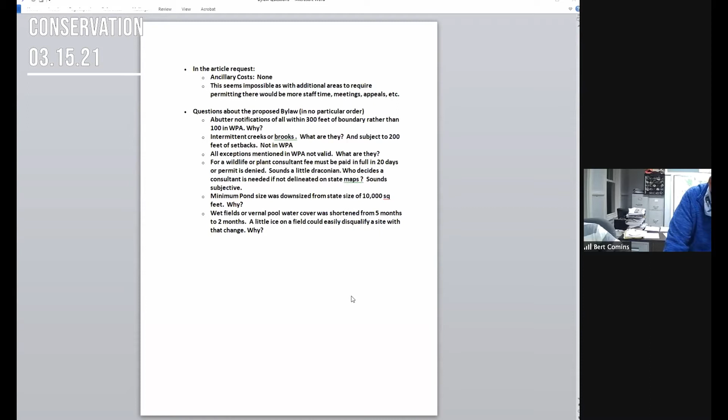Then questions in no particular order were: why is abutter notification of all within 300 feet of the boundary rather than 100 feet as in the Wetlands Protection Act? What are intermittent creeks or brooks? And the Wetlands Protection Act doesn't require 200 feet setbacks. Judy, should we address each of these? Well, I think the intent is to answer them, right? Yes, I agree. All right. Most of these regulations, weren't they taken from surrounding towns or towns that are similar to us? Yes, and they were also taken from the MACC, Massachusetts Association of Conservation Commissions' model bylaw.

Okay. Abutter notification is increased. It gives more people notice and the ability to participate. Intermittent creeks or brooks are streams as defined in the Wetlands Protection Act. And the bylaw increases the setback to 200 feet, classifying them in the same manner as rivers are classified in the Wetlands Protection Act. The bylaw is not limited to the limitations of the Wetlands Protection Act. In fact, the purpose of having a bylaw is to allow more flexibility and increase protections.

I don't have a list of exceptions in the Wetlands Protection Act. I'm not sure what that question means, Judy. Do you know? All exceptions are not valid. There is a part of the bylaw that mentions exceptions. Section 3 of the bylaw says that other than stated in this bylaw, the exceptions provided in the Wetlands Protection Act and regulations shall not apply under this bylaw. We could put together a list and post it on the website.

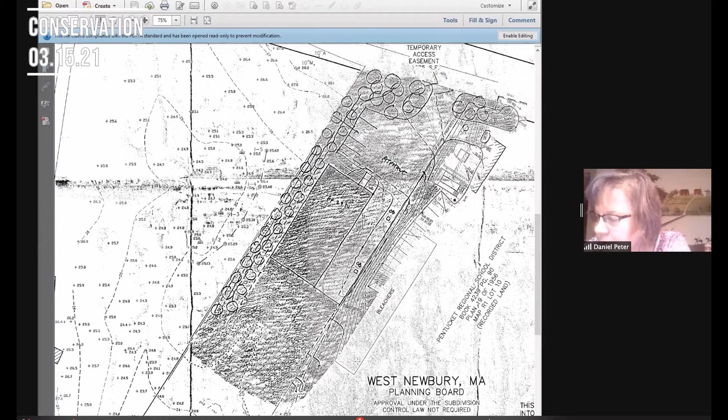So I'm here for a continued public hearing. I was asked if we would please do the calculation for isolated land subject to flooding for the area just to the west, as you're looking at the map, that puddle area, the depression area located off the property site. One thing that I wanted to make sure people understood is that there is no bordering land subject to flooding on the property or even the adjacent property, which we were analyzing in this case.

There's an Exhibit A, which shows spot grades on the plan that was originally provided, but I found a plan that had the spot grades in detail. From there, I blew them up and created Exhibits A and B, showing you these spot grade elevations, which I ended up using in the calculation for the isolated land subject to flooding. I've also referenced the Wetlands Protection Act regulations for isolated land subject to flooding and the Division of Wetlands and Waterways policy, which was revised in 1995. Exhibit C is the actual calculation used for determining isolated land subject to flooding.

I want to bring up the fact that on page 2, there were a couple of typos. The first one is down where you see 2,260 cubic feet over the acre feet. It should be square feet, not cubic feet. Underneath that long equation that starts with a V, it should be square feet for the acre. Bert, can you show what she's speaking of so we can see? And so that should be square feet in the next line too.

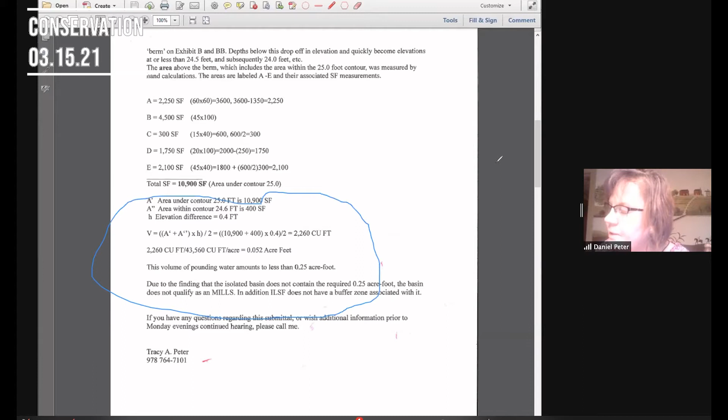And then the second one after that, I don't know if my computer auto corrected, but "mills" is isolated land subject to flooding. Yep. So what I did is I had to determine where the berm was. Let me just look. Is that an existing berm? That's where the water accumulates behind. It's not a berm. It was the area where the elevations change and drop off. Right. It's pretty much contained above the berm, and then it drops off to 24.8 from 25 feet, and then it jumps down to 24.5, and after that there's the contour for 24.

So I was trying to be conservative, and I calculated the volume of water contained behind that line that I labeled berm. From there, I took the calculations measuring the lowest elevation inside Exhibit B, which would be 24.6. That would be one elevation, and the upper elevation would be 25 feet. I calculated the total square foot area from the berm north, and it came out to be 10,900 square feet, area under contour 25. The area within contour 24.6 is 400 square feet. And the difference of elevation between the two is 0.4 feet.

And then we plug it into that equation: A plus A times 0.4 over 2 equals 2,260 cubic feet. Then divide that by the square foot acreage, and you get the acre feet: 0.052 acre feet, which is way less than the 0.25 acre feet, less than a quarter acre foot. And the area south of the berm is not a contained basin? No, that's where it would flow out.

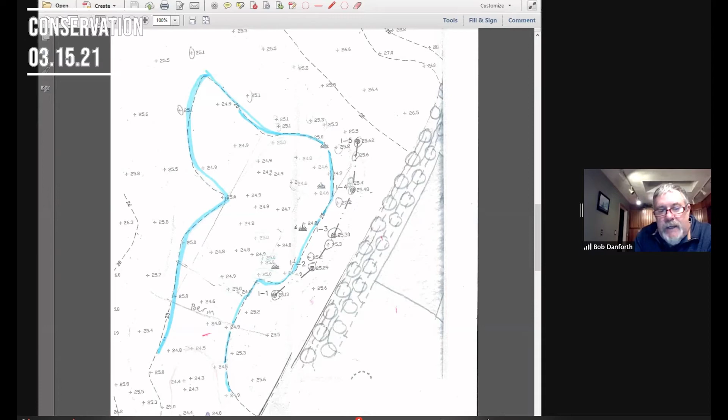I'm looking at a plan that is dated March 12th, 2020, which locates the building. Oh, that's the new one. So we moved the building almost 40 feet away. We moved it way away from there. I can give you some calculations right now. I think it was in the original filing, actually. I have it attached. But we're 50 feet off the property line with the building.

Okay, I'm just thinking, the earlier plan showed the building further away from the wet area. And now with this plan, you've moved it closer to the wet area, is that it? No, that's an old plan. Yes, that's not what was submitted. She's just showing the topos on that, that's all.

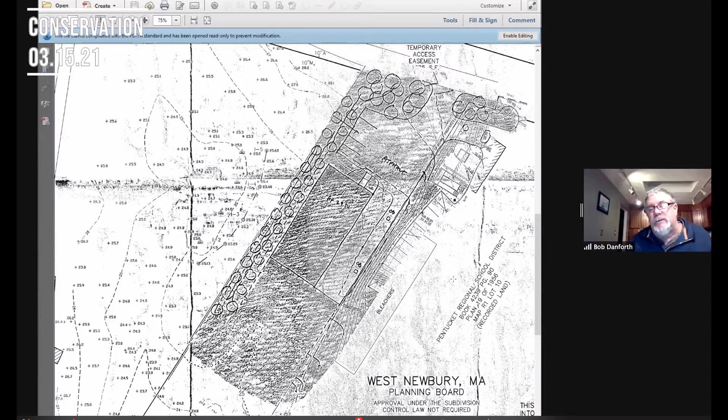Oh, I see, you're looking at the large plan. So Tracy, this was the full-size plan that you submitted. You're looking at Plan A. It's been changed since then. Right, exactly, this Plan A. I submitted that to the commission, but the actual building itself is in the original RDA. There are copies of it. They moved it almost to the property edge, the other side, near where the bleachers are, with a driveway coming in along the side of the building.

So the building would be 50 feet from the property line. And there would be a 20-foot wide driveway coming in along the side of the building, going out to the back of the building. And the driveway is what type of material? We're proposing gravel right now. We've got a limited budget. We'd like to pave it eventually, but we're trying to do it without raising taxpayers' money. So we've got it proposed as gravel for now, and then eventually paving.

If you wanted to, in front of the building, coming in off the driveway, there will be a garage door and a walk-in door where the cars park. If you want that paved, we have enough money to pave that. Well, which plan, Judy? It seems like there's more than one plan here. I want to make sure we have one final plan.

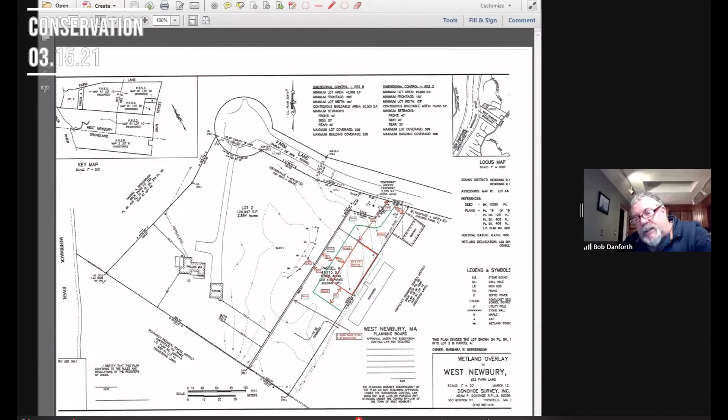Okay, and this plan we're looking at is dated March 12th, is that right? Yes. There is one other plan. I'm not sure, I don't have the date on it. There's another one, Bert? Yeah, so there were 3 total. There was one that did not show the green driveway area, the one that was actually submitted with the RDA. What is the date on this one? It's also March 12th, 2020. Okay, I think we need one plan so there's no confusion later on. Oh, absolutely.

And I would also like to see the calculations that Tracy was discussing on the plan instead of in a separate letter attachment. I feel like that's something an engineer typically would do. Sorry, I didn't understand what you said. Typically those kinds of calculations, I think, would be on the plan that's submitted. There'd be like a box or something that would explain the calculations. Well, the calculation is to determine whether it meets isolated land subject to flooding, but it does not. Right, but I would like to see that on the plan and have it stamped.

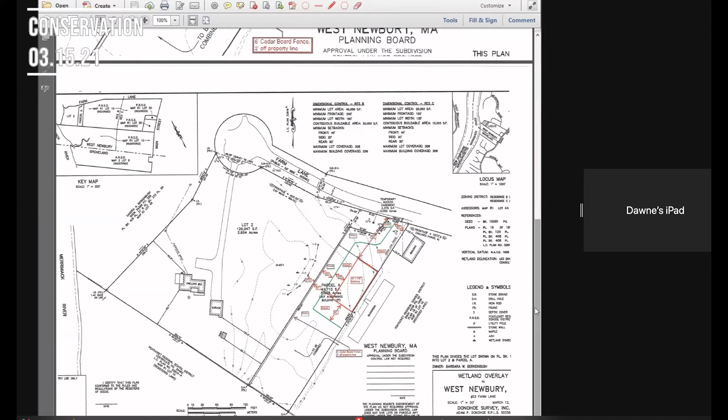All right, Bert, I think we're using the contours to define the wetland in the calculation? No, it's for the flooding. Yes. Okay, so Bert, you're gonna go take a look at this and then we'll revisit it in 2 weeks. Thank you. And Bert, are the submittals in the Google Drive folder for this? Yes, they are. The ones that Tracy was discussing? Yep. Okay.

Bert, when you walk, can you give me a call? Just call the facilities. I'd like to walk it with you. Yeah, I'll give you a call. All right, will do. Thank you, Bob. I just had one other question before you go.

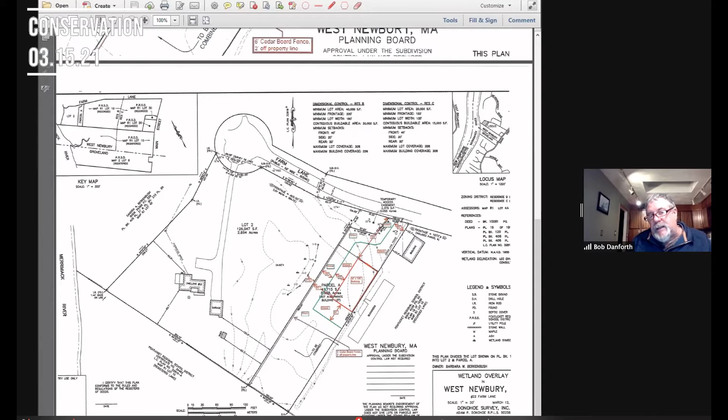Your preference is to pave it, but you're gonna use gravel to begin with. Is that correct? Well, yes, if you want the driveway paved from the road in and the parking for probably 3 to 4 cars, I'll pave that in front of the building. But around the building and behind the building was gravel. Okay, great, thank you. Yep.

What's on the agenda next? Middle Street. The applicant had requested a continuance for both those notices of intent, so for Middle Street Lot A and Lot B, they've requested a continuance. Next on the agenda is the continued public hearing for 519 Main Street.

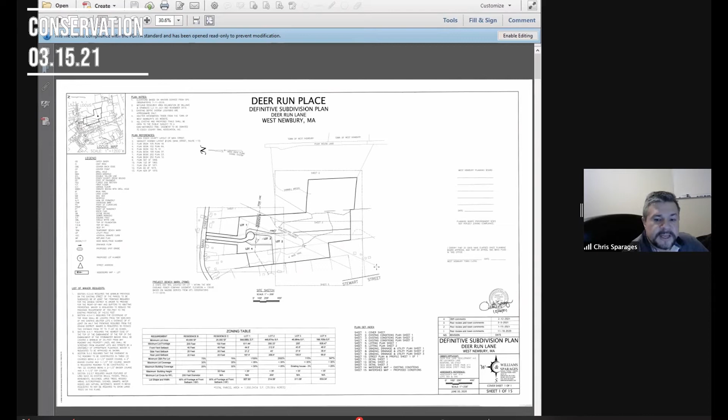Looking at the screen here, if we were to go to the detail sheet, it'll become obvious as you get down to the detail sheet which one it is. 13. Keep going. I think it's 13. Thank you. So here's the detail that we provided.

We added another sheet to the plan set, and we added in details on the sediment trap forebays for these small pocket wetlands, the micro pools, and you can see the little finger projections in the bottom of the constructed pocket wetland. Those represent our delineation of high and low marsh areas, and we do our volume calculations based on an even contour. The handbook explains that you would then create ins and outs.

What this allows you to do is when the water comes into the basin, it follows a more circuitous path back and forth, going from the in to the out. So it lengthens the detention time inside the pocket wetland before the water leaves the basin, providing for additional treatment and detention time in the stormwater management area. We did this for each of the 3 pocket wetland areas to address that comment from DEP, and that was their comment number 1.

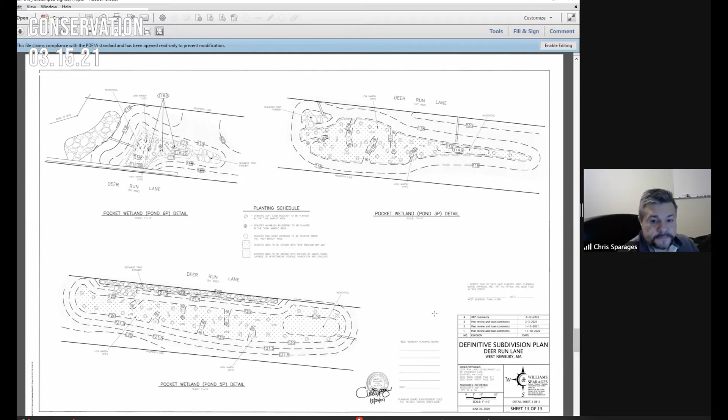If we could go back in the plan set now to the plan and profile sheet, which is sheet 10 of 15, that's going to be the next comment review. The next comment from DEP was need details on proposed wetland replication, and it referred to the MassDEP inland wetland replication guidance. You may recall that near the entrance to the project, due to the location of the wetland and the position of the roadway, we have a small proposed wetland fill in the open meadow area that's mowed regularly as you're coming in on the existing driveway.

On the left-hand side, we have a proposed 260 square foot wetland fill, and we've minimized that proposed fill by building a retaining wall along the edge of the activity. But we didn't detail exactly how the replication area was going to be built; we just referred to it. It was such a small area. But what we did on this sheet, you can see the bubbled area near the top of the plan there.

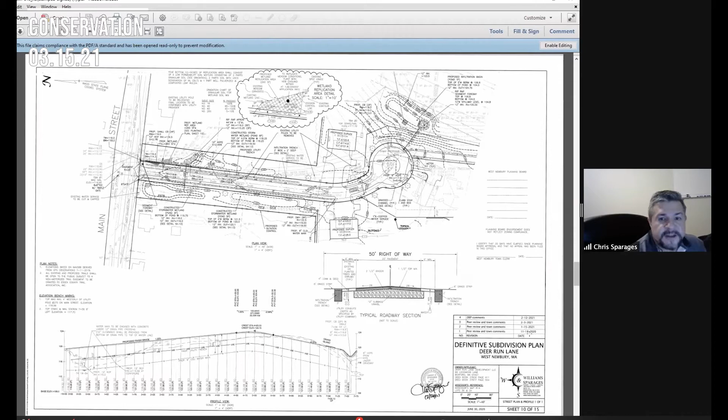And if we were to zoom in a little bit on that, there are some words to the left of that clouded bubble, and the clouded bubble itself shows how we intend to replicate that area. And you can see in the clouded wetland replication area detail plan, it's a 10 scale blow up of the replication area, and it shows the retaining wall, and it shows how we intend to dig down a little bit to create the same sort of elevation profile across the replication area.

It's very shallow to begin with, and all we're doing is taking it down a little bit just to sort of match the elevations along the wetland flags in the back. And then we detail that we would over excavate and place 12 inches of material in the bottom of the replication area, making sure that it's a low permeability soil mixture consisting of 2 parts of granular soil, 2 parts soil with a USCS designation of ML, and 1 part of well pulverized composted leaf mulch. And then we show the gradation chart for the granular soil wetland mixture.

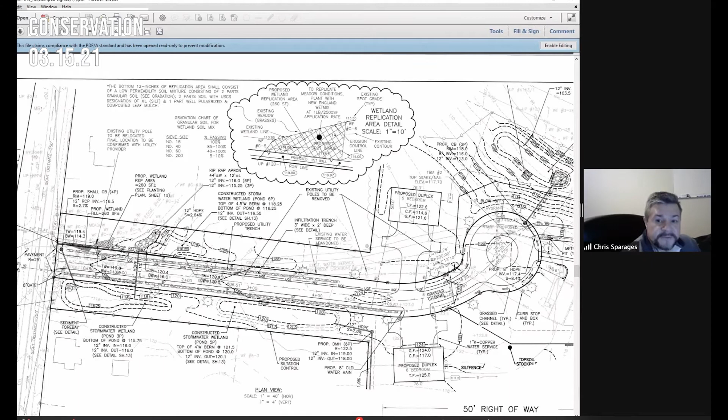And then we proposed to replicate the meadow conditions, simply planting that area after it's prepared with a New England wetland seed mix at a ratio that New England wetland seed mix folks recommend for this particular seed mix. It's 1 pound per 2,500 square feet of an application rate, and then that will take care of itself. And so that addresses the response to DEP's comment number 2.

DEP's comment number 3 reads as follows. A 401 water quality certificate is required on wetland fill in a real estate subdivision. And we responded, and let me read our response, and it kind of explains why in this case, a water quality certification application is not required if you do certain things. And so we refer to the section of the CMR, it's 314 CMR 9.04(3).

It says that it requires a 401 water quality certification application for fill materials associated with the creation of real estate subdivisions, unless there is a valid, unexpired final order of conditions, followed by a certificate of compliance and a recorded deed restriction, providing notice to subsequent purchasers limiting the amount of wetland fill to the single and complete project to less than 5,000 square feet cumulatively of bordering and isolated vegetated wetland and land under water, and discharge is not to an outstanding resource water. And so that's a lot of legalese, right?

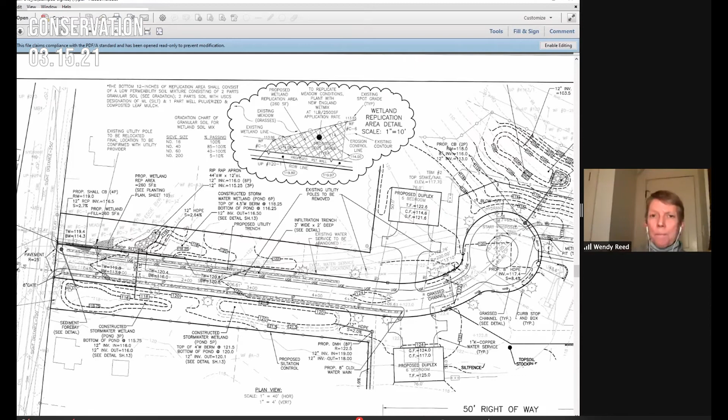Right. So if the commission agrees to allow the project to move forward, what I would encourage the commission to do is to include as a condition in the order of conditions that a deed restriction be prepared right away and be put on record before any of the lots are deeded out. It could go on right away. And that way, once it goes on record, that's it. Any subsequent deed out will have that deed restriction on there. So if it's a condition of the order, then it's gonna happen. Okay, thanks.

The size of your replication area is 1-to-1. That's correct. We have had at least 1.5 or 2-to-1, given the difficulties of having replication areas work in their entirety.

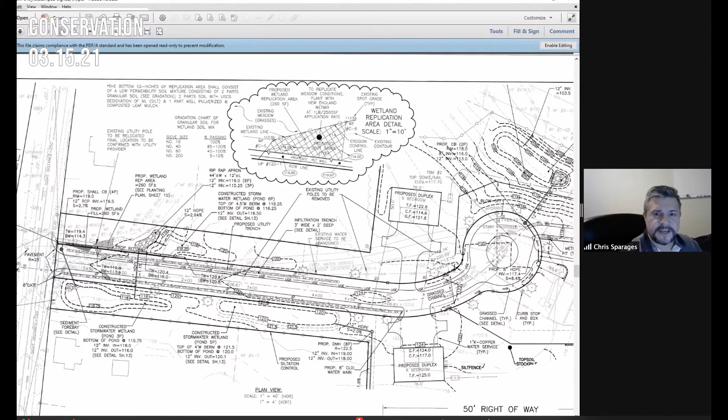Sure. I think that in this case, if we were to zoom in... do you guys typically give control? Can I share my screen? Yeah. Is it okay to share my screen, Bert? Let me just make you the host. Okay. You tell me when I'm ready. You should be good to go. Okay, I'll pull up a PDF, and that way I can zoom right in. So can everybody see the PDF?

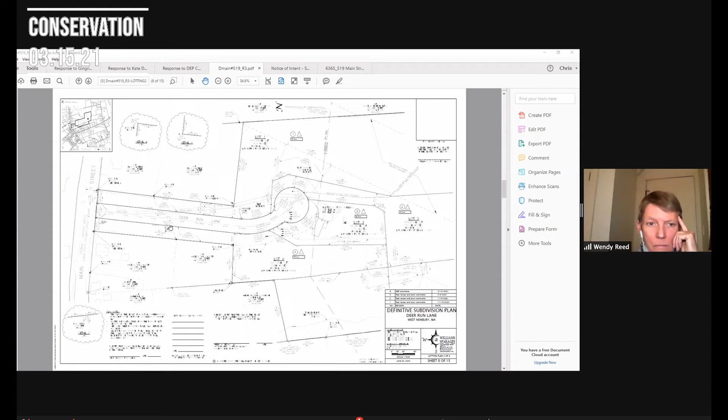Yeah. Okay, great. So I'm going to zoom right to our topo plan here, and I'll go right to the profile sheet. So this is the profile sheet, and near the entrance out here is where our proposed replication area is, and we try to position them close to where the fill is. You can see just to the left here is where the fill is, and here's the replication area. We can definitely increase the replication area in this direction, and it looks like without much trouble, Ms. Meisner, we can get to 2-to-1 if that pleases the commission. That'd be great.

You may recall it's very flat down in this area. This is all open meadow, and that won't be too much trouble at all. This is the 114 contour here that I've drawn in proposed. So all I'll do is just peel this contour back a little bit, starting let's say over here, and peel it back something like that. And then that'll show the contractor that this area just needs to be dug out a little bit.

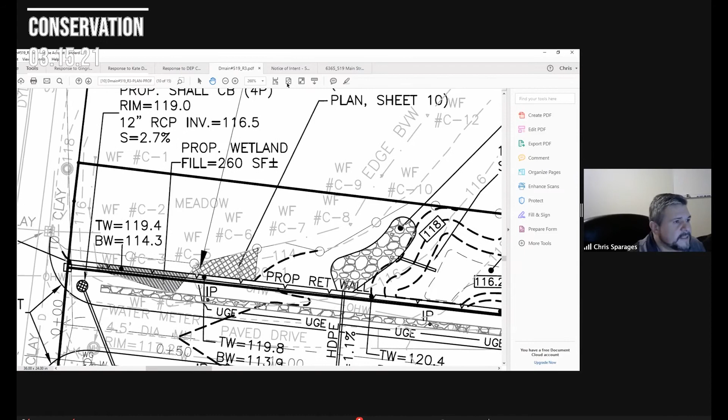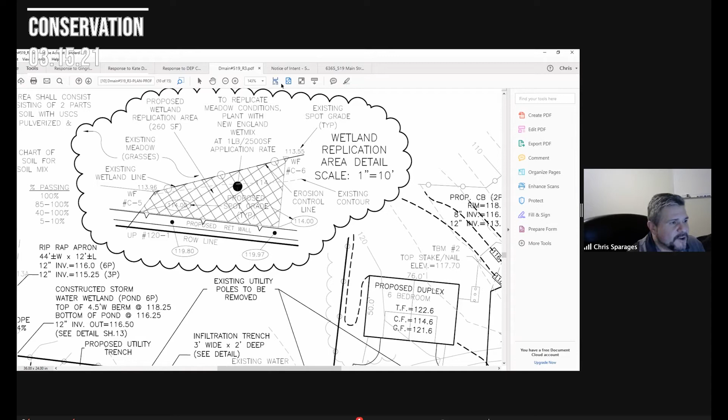I'm running out of real estate on this sheet of paper, so I'll have to find a new home for this guy, because he's going to get bigger. But I'll figure that out on my end. But we can do that. That'd be great.

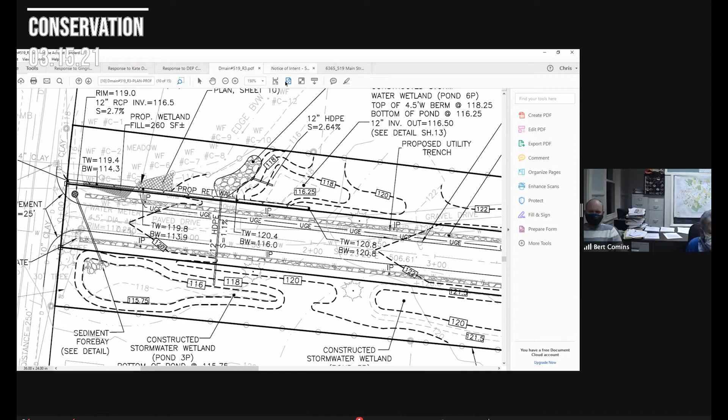If you remember, there really are no trees over here. Sometimes we worry about making replication areas bigger than we need to, because you go out there and you're like, oh my God, we have to cut down these huge trees to create a replication area. But in this case, there aren't any trees over here. It's more of a meadow. And I think that meadow is a habitat that we have less of and want to keep for various wildlife purposes. Okay.

On sheet 12 that has the stormwater management area profile. Yes. For some of them, your proposed grade is below your existing grade, and for some of them, it's above. Can you explain that?

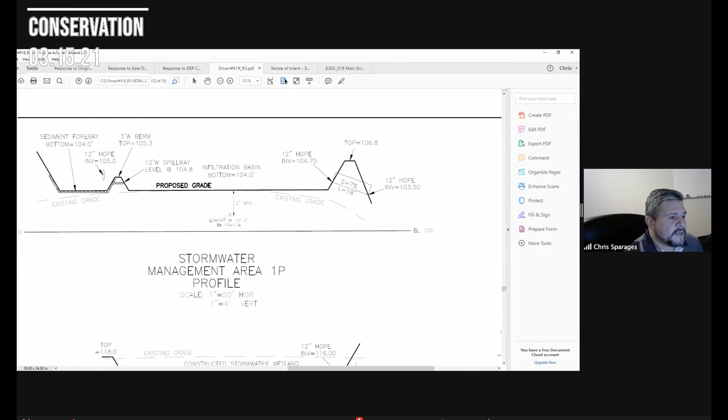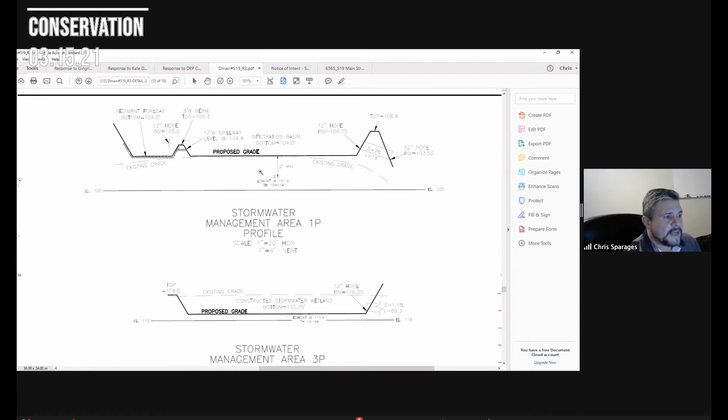Sure. So it depends on where we happen to be on the landscape, but the biggest reason why that happens... Let me just open this up a little bit again. So we have a couple of different types of stormwater management areas. We have an infiltration basin, which is this stormwater management profile through 1P. This is for an infiltration basin. And the one right below it happens to be 3P, which is a constructed stormwater wetland.

So for an infiltration basin, DEP wants us to position them so that the bottom of the infiltration basin is at least 2 feet above the estimated seasonal high groundwater table. And for a pocket wetland like this, at or near the groundwater table for the bottom is preferred, because you're trying to get different types of vegetation to grow.

So in general, that's going to be the reason why you see a difference between why we're able to excavate for some of them, and why on some others we have to kind of keep them up high, because we're trying to maintain that separation from high groundwater to make sure that these are acting more like infiltration basins.

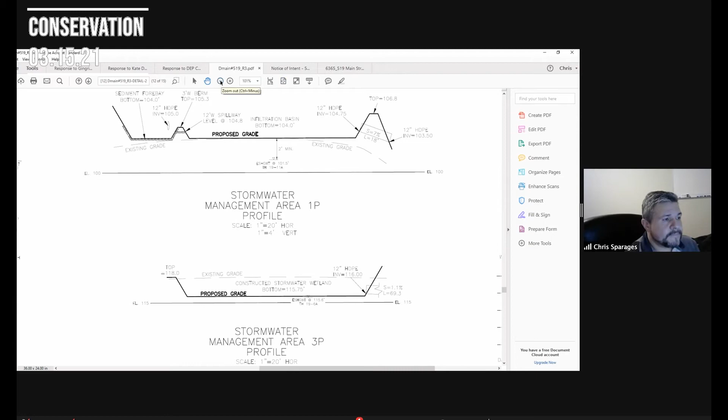Thanks. And on stormwater management area 7, you have an assumed estimated high water, and the others, I assume that you did some kind of soil samples for the others, because it doesn't say assumed. Is that accurate, and what are you assuming?

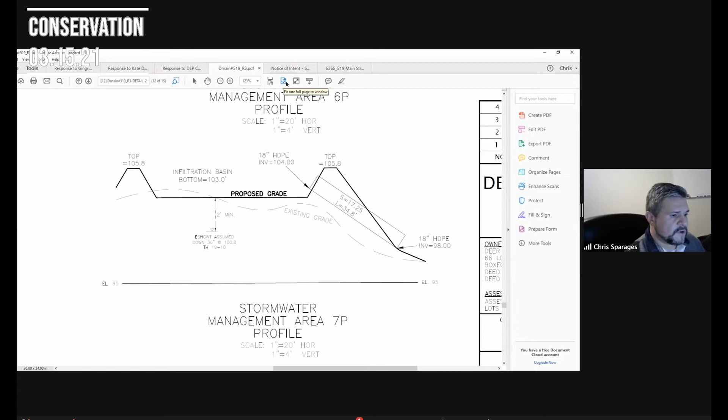Yep. So sometimes, depending on where we draw the profile line, they may not intersect with one of the test holes. So let's just take a look at stormwater management area 7P real quick. I'll go back and find it. Let's take a look here. So let's go up one sheet here.

So 7P is one of our infiltration basins, and it's located behind lot 2. So here's the roadway cul-de-sac, and lot 2 is back here. It's one of the stormwater management areas that's in the back here, and all it does is collect some overland flow from the backyard of lot 3 and lot 2. And it looks like the closest test hole data that we have are for some of the test holes that we did for the septic systems.

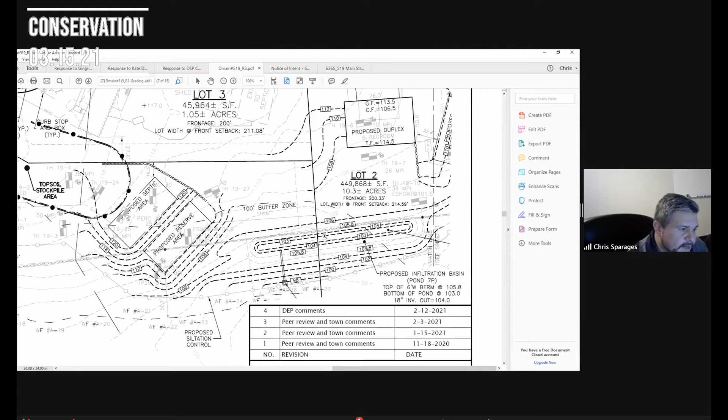And so we have test hole data along the 106 contour. We have test hole P31 on the left here along sort of that contour line. And then we also have test hole T19-10. And so sometimes when we don't have one exactly in the area, we can use some of the other test hole data that's along the same contour in that same vicinity to get an estimated groundwater surface in this area here. Now going back to the detail sheet that shows the profile, let's just take a look.

So those other 2 test holes, we had test hole, and it refers to that other test hole, Ms. Meisner, that test hole 19-10, down 36 inches at approximately elevation 100. And we're showing that the bottom of the basin is up at elevation 103, 3 feet above that elevation 100, where 2 feet is required.

And so we kind of built in a little bit of a fluff factor here to be a little bit more conservative because we didn't have a test hole exactly within this area. So I think that's a fair assessment, and we kept it an extra foot above our estimated seasonal high groundwater table here in this case.

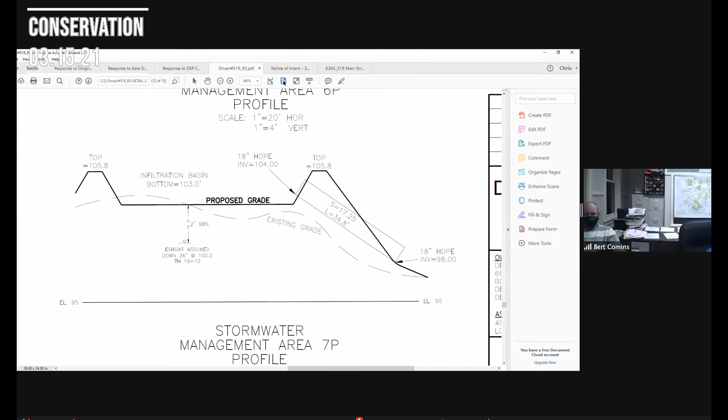Thanks. On sheet 8, lot 1. Yes. The location of the septic system. Is there a reason that the proposed septic system is closer to the wetlands than the proposed reserve area? So I believe in the town of West Newbury, we do our grade out, if you will, for both the active and the reserve on our septic design plans. It's a requirement. Yeah. We don't do this in every town, but in West Newbury, it's an absolute requirement.

I'll be very honest with you. It looks like we have 2 deep holes and 2 percs in this area down here, and 2 deep holes and 2 percs in this area up here. And it looks like the soils were a little bit more favorable at this lower elevation. And so we're taking advantage of those better soils and placing the leaching field using the active area as this lower area here.

Okay, I was just wondering why it was not being reversed, and you've got an answer. Okay.

I noticed that your note about the trails says that you are giving the easement to Essex County Trail Association. Is there a reason you're doing that rather than giving it to the town? Yes, and it's really a matter of when Mr. Crow, who represents the ownership of the properties, purchased the properties, he knew that it also came with an existing trail and trail easement.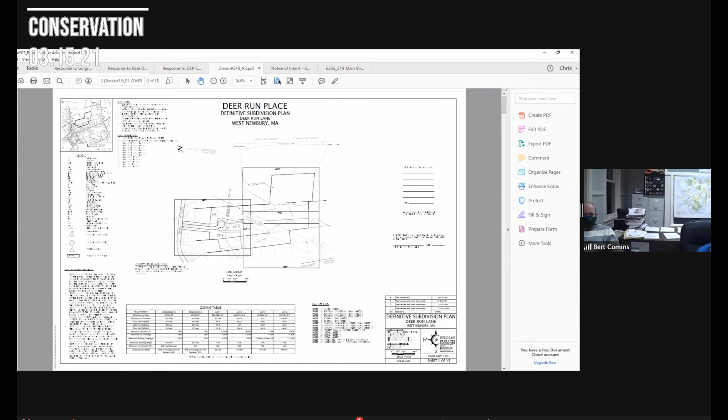I think that's the end of my questions right now. Anyone else have any questions? No. Would it be appropriate if I asked a question? This is Fred Chanania. Sure.

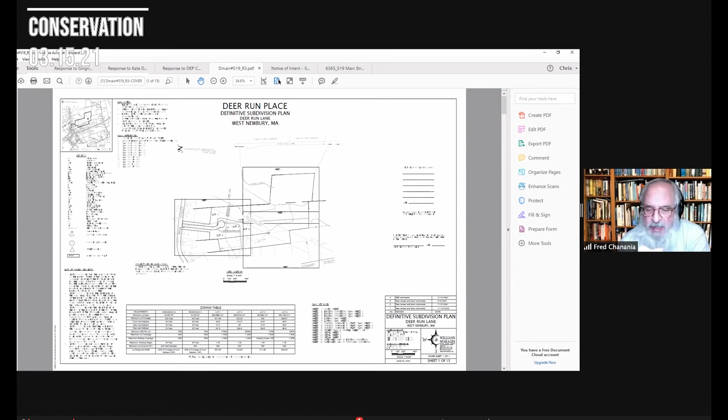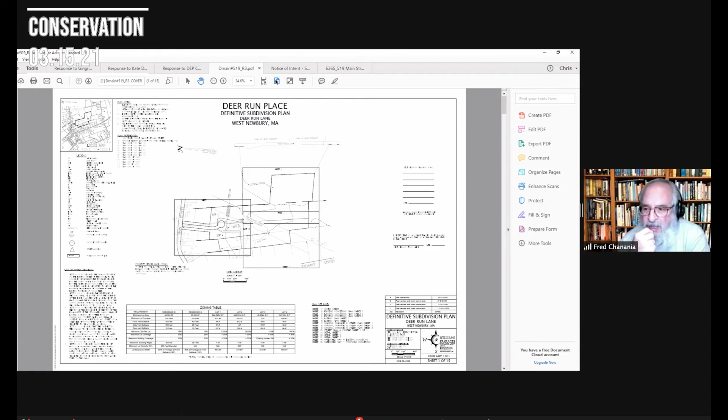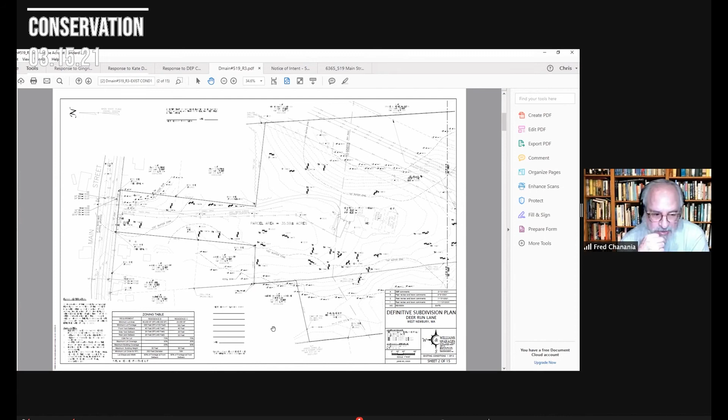Chris, when I was with you on the site walk in December, I'm just asking if something has changed about the entrance, the location of the entrance to the driveway. It seemed like it might have been moved more to the east where the existing entrance is, if I'm seeing the plans correctly, than when we were there in December. But perhaps I'm just not quite understanding. And the reason, of course, is there are a couple large trees there to the western side of the proposed driveway.

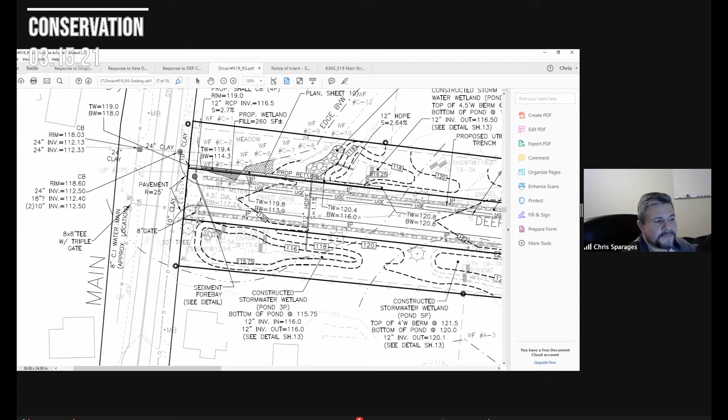Right. I can tell you that it has not changed since that time, and our hands are a little bit handcuffed because of the way we have to position the right of way and center it on this narrow strip here. And unfortunately, as I mentioned during the site walk, there are a couple of trees out in the front here, and they're going to have to be taken down in order to accommodate the construction of the road and the stormwater management area out here. Okay. Thank you. That's really all. Okay.

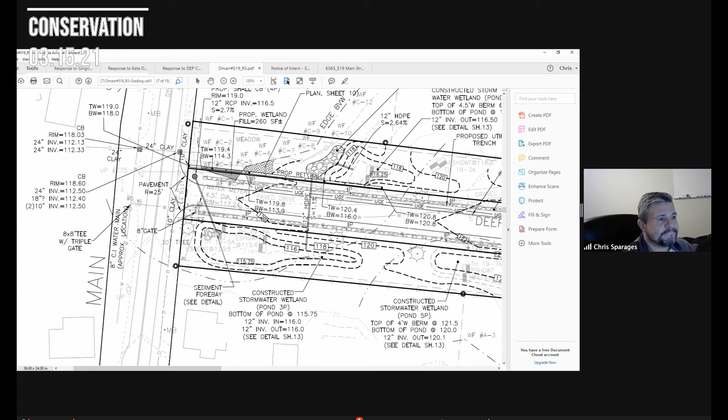I guess what I would propose is, since it's a subdivision, with replication area and maintenance provisions, maybe it would be good to draft an order of conditions and circulate it, and then actually have a vote in 2 weeks. That works? Are you asking me? Asking you. Oh, yes, absolutely. That sounds like a great idea. Okay, and you can, in the meantime, get a revision for the replication. Yeah, we'll be happy to.

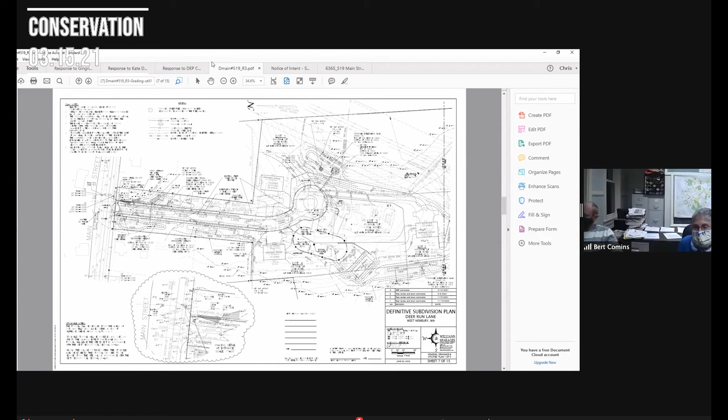And when you flip to the plan and profile sheet next time, don't be surprised if the wetland replication area detail might not be on that sheet anymore. I'm going to have to find a new home for it, I think, because it's getting so big. Okay. Well, thank you. So we'll continue this to the next meeting and circulate a draft order before then. Okay, thank you very much. Thank you. Thanks.

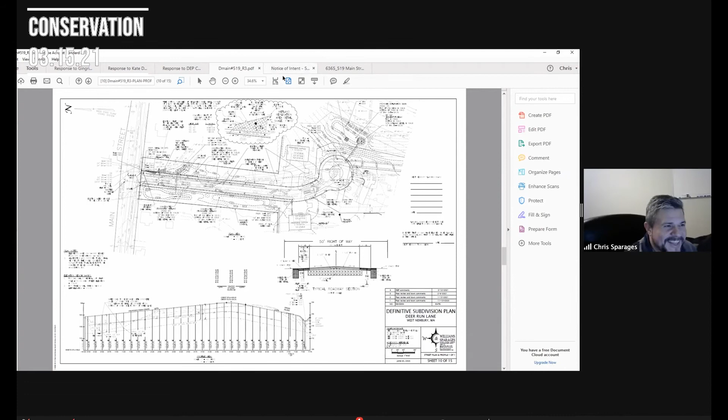All right. Make me the host of the meeting again. Yeah, sorry, I'm going to stop sharing. Thanks. Bert, did that come back to you? Nope. So if you put your cursor over my screen and click the three little dots up there. Oh, okay, sorry about that. Okay, thanks. All right, have a good night, everyone.

Thank you. Next on the agenda, we're opening a public hearing on a notice of intent for 34 Ash Street for the construction of a wetland crossing. Is there someone here? Is this you, Greg? It is, yes. Good evening, everyone. For the record, Greg Hochmuth from Williams and Sparages, here representing Pat Kelly for the notice of intent filed for 34 Ash Street. I think everybody knows where the Christmas tree farm is. Bert, if I could share, I just wanted to give a brief history of the parcel. Sure. You should be good. All right, can everybody see that?

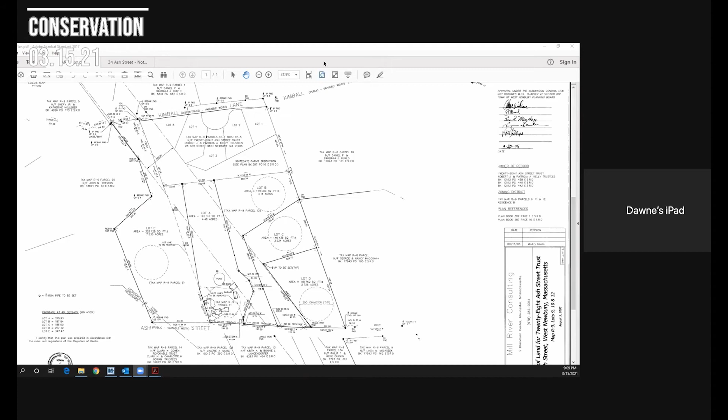Yeah. So in 2005, Pat hired a company to put together an A&R plan to carve up her property into 5 lots. So we've got Lot E, Lot A, B, C, and D. Her house is located currently on Lot A, and the project that we filed a notice of intent for is on Lot D, which is down in the bottom right corner. But as everybody knows who's driven down Ash Street, there's a roadside ditch that meets the definition of BVW. And the only way to get to 4 of the 5 lots is to cross over that ditch.

When Pat approached us a couple of years ago, the thought was to try to utilize, there's a little white gate where the power company accesses the utility easement. And that's shown roughly in this location here. And the thought was to file a special permit application with the planning board for a common driveway to come in utilizing that existing access to get to lot B, C, and D. It just made sense. There was a crossing there, there was a culvert there.

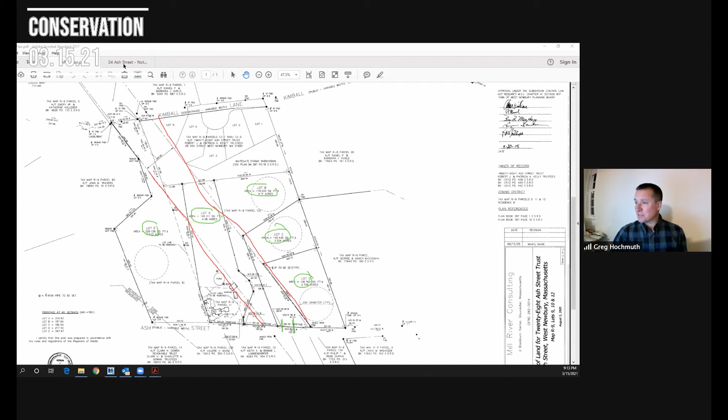But Pat does not want to sell lot C or B right now. There's plenty of Christmas trees there and she wants to continue to farm them for years down the road. But she does want to sell one of the lots, the lower lot, lot D. So that brings us to, let me just close this. I have to clear the annotation here. Can everybody see that other plan now?

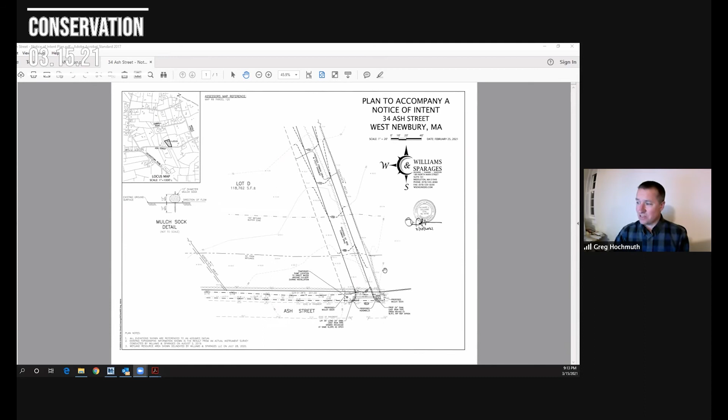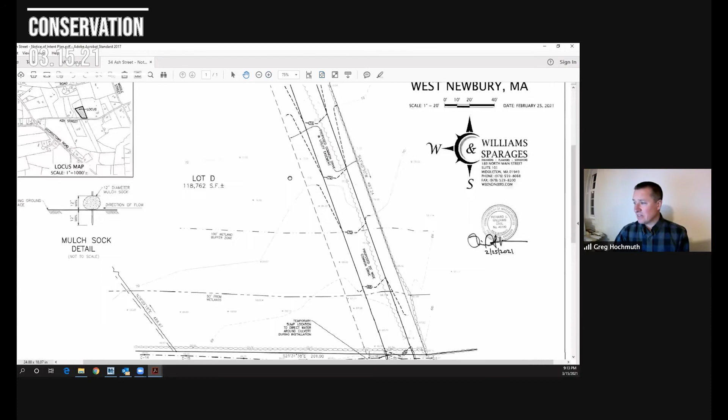Yeah. All right, so this is just a 20 scale plan that we did of Lot D. This is the bottom right corner of the parcel, which I guess would be the easternmost portion of her property. The property to the right is the equestrian facility. And I'm going to zoom in on this here. So what we did is we delineated the BVW associated with the ditch. It's shown here as a C-series wetland. I believe Mary Rimmer had flagged this probably 10 years ago. I think Pat's been contemplating doing something out here for a long time.

But we just filed a scenic wall application with the planning board to propose to break the wall here. And we also met with the tree warden on site last week to take a look at, there's a hickory tree right near where wetland flag C21 is. I requested the meeting with Wayne just to see his thoughts. I didn't want to put words in his mouth, but at least half of the root system of that hickory is undermined as a result of water flowing through that ditch. The tree is showing some stress, and we were trying to determine whether or not it was going to be deemed a high hazard tree.

Wayne wasn't ready to make that decision, but what he did say I could say is exactly what I told you. The tree's root system's undermined and the tree is showing signs of stress. In other words, it's on its way to becoming a high hazard tree. There's a utility pole right next to the proposed driveway entrance with a transformer on it. And if that tree did fall, it would take out the wires and make a big mess.

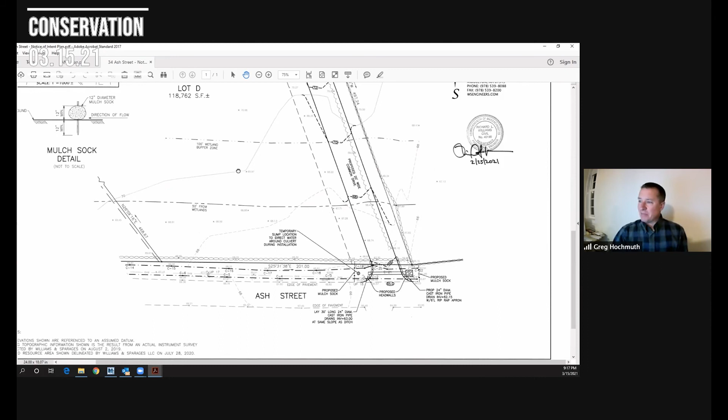And then once you get into the lot, out in the field portion of Lot D, there are some damp areas, and anybody that's driven by there looks in and sees some Christmas trees that don't look quite as well as the others. And I suspect the main reason for that is because it's pretty damp out in that field. There are some isolated wetlands in Lot D. They don't border on this ditch, so they're not jurisdictional.

But what we are proposing is to keep the driveway as close to that stone wall on the east as we can. That's how they drive the tractors around now. It's slightly higher, it's drier, but we want to try to preserve as much of that tree buffer that runs along the wall between the horse field over here and the tree farm on Lot D. So that's it in a nutshell.

I will say, if this was a driveway for just a single family house, it wouldn't be as wide as what we're proposing. But because it is anticipated that we will be filing a special permit application for a common driveway, we wanted to make it wide enough now so we didn't have to come back to the commission to do something different if and when those other two lots sell.

So you're saying that this would access lots B and C eventually, as well as lot D? Yes, but I will say if somebody decides that they do want to try to go down the road with National Grid and try to permit something within their easement, they can try. But based on my conversation with National Grid, it makes no sense to even go down that road right now. It sounded like it would be a 99% no. Unless we had no other options, and we clearly do.

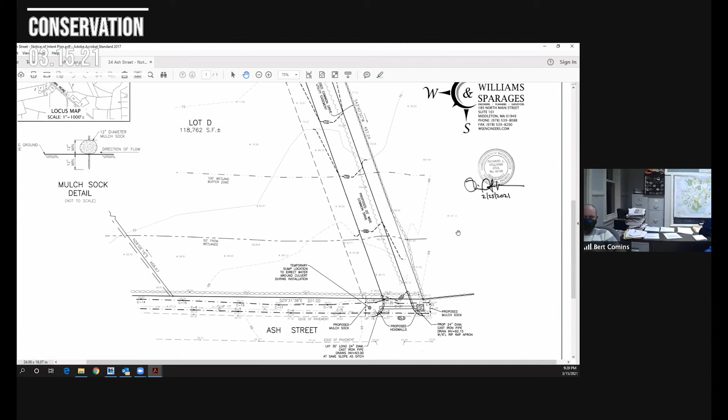We don't have a file number yet. The website still says waiting for fee to clear revenue. But I imagine the commission will want to do a site walk anyways. Yeah, I'm kind of interested in the wet areas in addition to the street. Yep. It was cold this morning, but I was out in the field, and the conditions are fine to get an auger in the ground. So I don't think you'd need to wait for things to really thaw out. I think we're there. I think it's supposed to warm up this weekend after the next couple of days too.

So Greg, would you be proposing to plant in kind if that hickory tree had to come down? Yeah, we talked about that. I talked about that with the tree warden. I said, Pat would be more than willing to plant additional trees, and he had thought that we were talking about deforesting that entire field.

The reality is the house would sit way back, and none of those trees that you see now would be proposed to be removed out in the field. And I can show you guys where the house is being proposed during the site visit. But the only tree proposed to be removed anywhere near the Conservation Commission's jurisdiction would be just that one hickory tree to gain access.

And I will tell you, if you slide this driveway to the west, that whole frontage is lined with hickory trees. So this one just happened to fall in the middle of our driveway, but it's also the tree that's in the worst shape. So I do think it makes sense, if you have to take one down, to take this one down. Mm-hmm. Okay. Yes, she would propose more trees if that's what the commission wanted.

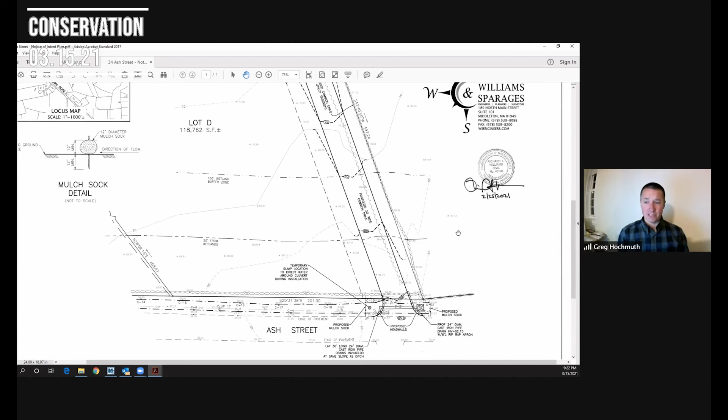Well, would the 28th work for a site walk? That works for me. I don't go anywhere anymore.

Nor do I. Who does? All the people who are on their way to Florida for spring break. Oh, yeah, yeah.

Yep, that's what, 8:30. Sorry, eight thirty. Judy? Well, I didn't hear, did you say 8:30? Yeah, okay. Does that work for everybody?

Yep, that's good. Greg, FYI, you're still sharing your screen. Oh, yep. How's the schedule look? Hold on. Oh, thanks, Wendy. Sure. Long day. All right, Bert, I'm gonna give it back to you. All right, thank you. Good.

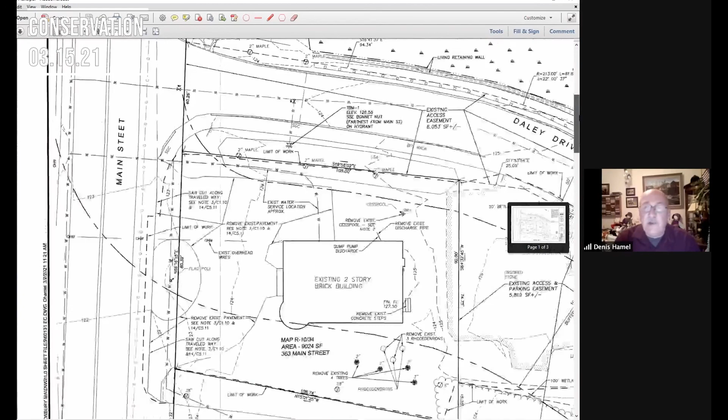Greg, good night. Next is a request for determination of applicability for 363 Main Street, site work to restore the GAR post building. Good afternoon or evening, I guess it is. I'm Denis Hamel from GM2 Associates, representing the town of West Newbury in this case, for 363 Main Street, which is what's known as the GAR post building, but the town prefers to call it the Soldiers and Sailors Memorial Building. That's the name they want it to be known as. And just a brief thing to get started here.

They're doing a historic renovation of the building. They got Spencer Sullivan and Vogt to prepare the plans to have this building renovated and fixed up and continue to be an historic building. So along with it, we're going to do some site work, obviously, to make things work and to improve the conditions some. What you see in front of you is the existing conditions and demolition plan. If you look on the Main Street side of the property, as you're probably aware from driving by this 100 times, there's a parking area out front of the building.

And you see a flagpole, which looks like it's in a circle there, but that's actually the grass area and it's all pavement around it. So the first thing we're going to do is actually remove the pavement from that whole area. As you'll see once we get to the next sheet, we're just proposing some walkways through there. So we're going to be removing a substantial amount of impervious area along that section. And you also see the flagpole is within the right of way of Main Street, so we're going to have to move that flagpole back onto the property.

And beyond that, you see down in the lower right-hand corner of the building, there's some shrubs and some rhododendrons and some small trees that were planted by the developer of Drake's Landing as part of a previous agreement with the planning board to screen the abutter from the parking area to the rear, which is currently in a crushed stone or gravel condition. It's not pavement yet. It always has been proposed to be pavement, and it will be pavement when we're done. But those trees are going to be removed.

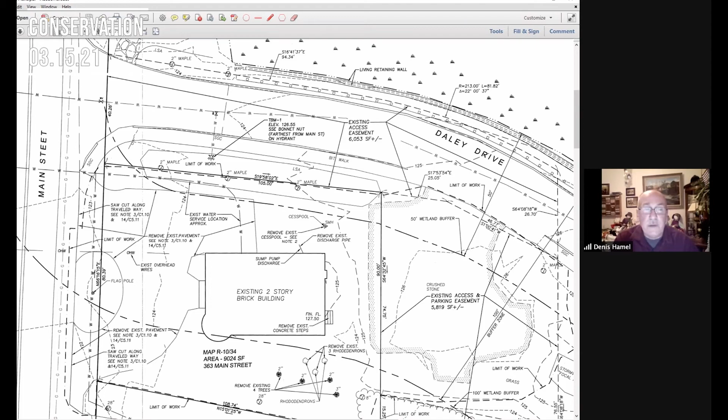Okay, now you can see what the developed site's going to look like. You can notice, first of all, on the right-hand side, the parking area that was gravel is now going to be paved. And you'll notice on the front towards Main Street, that whole parking area is gone. And you'll just see a walkway coming across from Main Street to access the rear of the building, which is going to be basically the main access in and out, but they're going to maintain the front access as a historic doors and entrance to the site.

It will be operable, but most of the traffic will be coming in from the rear of the building, going into the building. The flagpole on this plan shows it still being in the right of way, but on our site plan to the planning board, we're actually moving it back onto the property.

Now, the wetlands associated with this property is on the other side of Daley Drive. If you remember during the approval process of Daley Drive and Drake's Landing, that whole area or portion of that wetland came in near where the parking area is to the rear that we're paving. So that all got filled in during the construction of it. So now the wetland boundary is the base of the slope coming down off of Daley Drive.

It doesn't really show up too clearly here, but there's a little dashed line that runs along the base of the slope, and that's the actual boundary of the wetlands, right at the base of the slope or the fill area. Now that wetland was replicated at a 2-to-1 up by the rear of the pond, further into Drake's Landing, if you remember that during that process.

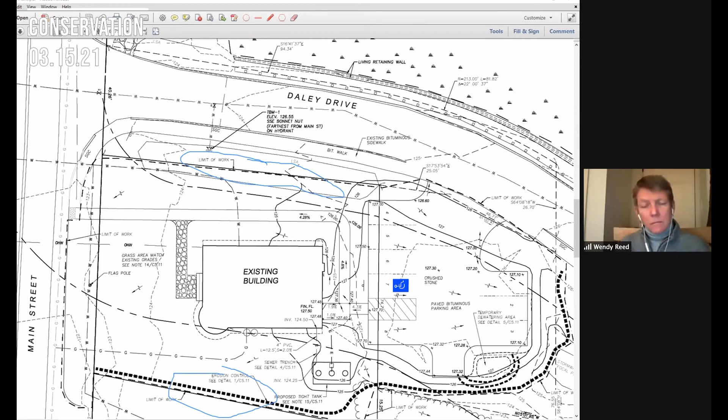The limit of work is basically that dashed line. I can't point it out, but if you look at it, it says limit of work right there. So it runs all the way around the property where the work involved with this particular site's going to end. If you look along where it meets Daley Drive, there's a sidewalk that runs along there already. We're just going to be butting the new pavement up to the back of the sidewalk, so there'll be no interruption of Daley Drive whatsoever.

It doesn't quite show, but over to the right, Bert, if you can slide that over a little, you can see it just goes around the base of the basin because they've got to do some grading at the base of the parking lot before it hits the stormwater management, which is that focal point right there at that corner of the parking area. So there is a silt sock running all along that, and then you've got Daley Drive on the other side. But we're not proposing any fence in that direction.

And what kind of erosion control are you proposing? That's going to be a silt sock, a 12-inch diameter compost sock. In the detail sheets we do show the detail of that; I didn't include it with this plan. A lot of that is on the outside of the buffer zone, other than that one little stretch along the right, and that's all part of the Drake's Landing stormwater project. So the flows are obviously very small because this is a tiny watershed going in basically two different directions.

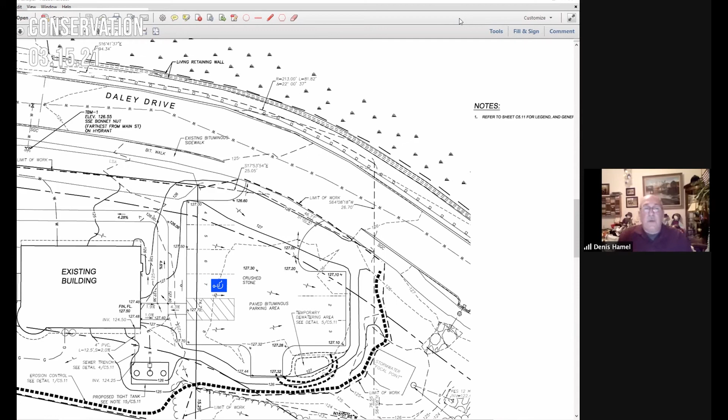And the paving material that you're removing will be disposed of off-site? Yes, it will be, as well as any of the material removed for that cesspool that has to be dug out. That will all be removed off-site to a site suitable for those types of materials. Are you using a permeable paving product, or is it regular asphalt? This is regular asphalt. And again, the asphalt for the parking area is all included in the Drake's Landing stormwater management project.

And how big is the tight tank? Is it a standard or is it oversized? I discussed that with Paul Savigny and the Board of Health. Sizing it is difficult because we don't know how many people are going to be in here using it, so we went on a practical matter. The minimum size tank is 2,000 gallons, and with the flows that we calculated for this building, the requirement would be substantially less than the 2,000.

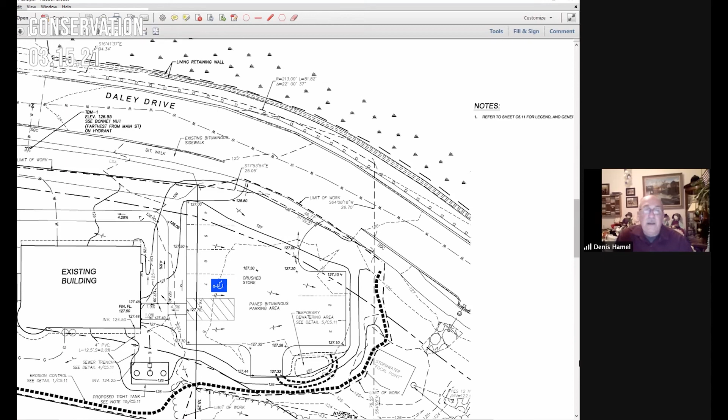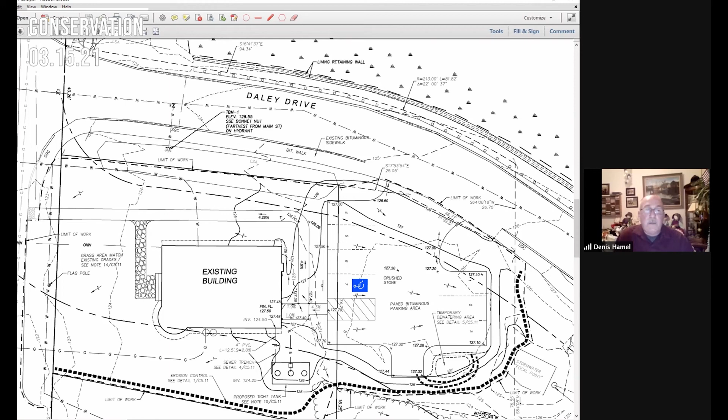But see where the walkway goes from the front parking lot and takes that sharp left-hand turn, right between there and the parking area on the top is where there's an evergreen tree being planted. And there's going to be a specimen tree planted along, you can see the front walkway that goes to the front of the building. That's going to be bluestone.

And on the part where it meets the bituminous parkway, there's going to be a tree planted there, a large tree. I forget the name of the tree, but it was kind of a specimen kind of tree. It's going to be deciduous, so it'll come and go with the seasons. So those 2 trees plus the 3 arborvitaes are what we're replacing those other trees with.

And those trees are new; they're not old trees. They were just recently planted, within the last year or 2, by Drake's Landing. They're the ones who planted those trees there. But generally, other than that, the site is going to be maintained as a lawn, just to keep it clean. Okay.

Molly, are you an abutter to this project? No. I don't share a boundary, but I'm within 300 feet, I think. So I did get a notice. Okay.

I'll move that we issue a negative determination for the project as proposed, given the nature of the work and the roadway between any work and the wetlands, with the conditions that any paving materials or materials from the cesspool removal will be disposed of off-site.

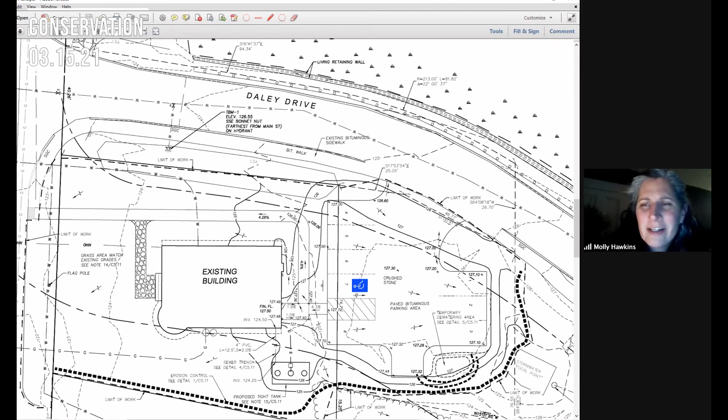Nope. Dawn? Aye. Molly? I don't know if I should vote. Okay, so you... I'll just abstain. Abstain. Yep. Wendy? Aye. Tom, are you there? Yeah, I'm here. Aye. Judy, aye.

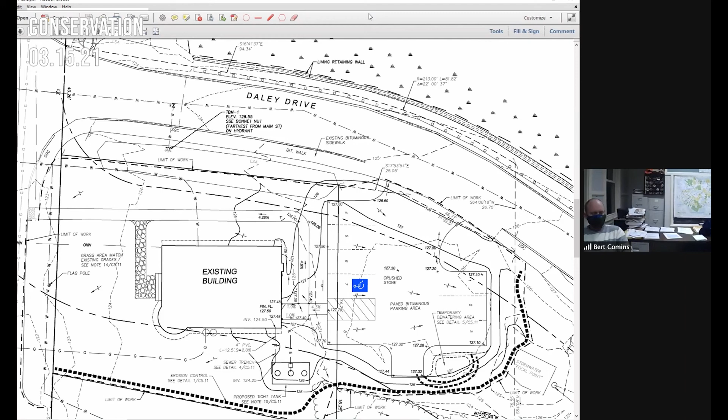Okay. Dennis, I have one question on the aerial view plan that you sent. Yes. What you've got marked as town hall is actually the town office building. Yes, that's correct. I'm sorry for that error. And on the other side, it says town of West, it should be Newbury right of way. You have a T instead of an R. Okay, sorry. For your information.

I'm not known for my spelling, so. Nor am I. Okay, well, thank you very much. Thank you. Bye. Bye.

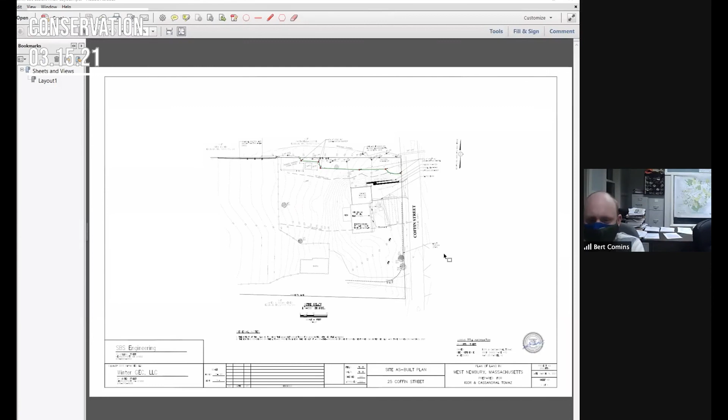Next on the agenda is a request for a certificate of compliance for 25 Coffin Street. So this was on the agenda last week, and the partial certificate was issued, and now they're back looking for a full certificate of compliance. Okay. That as-built that was submitted.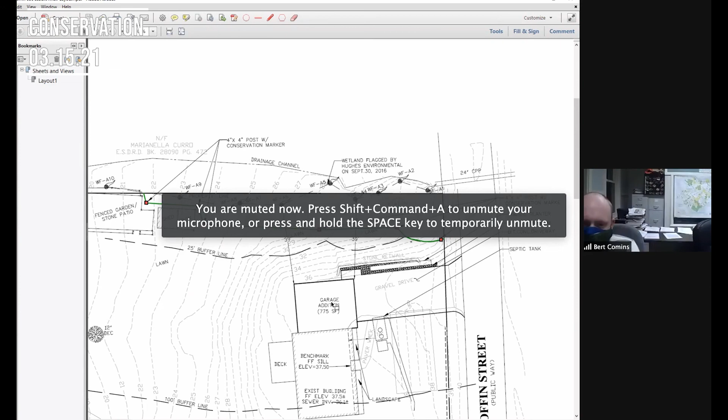So what happened with the trees? So they have done 28 new plantings out there in the time since our last meeting. Wow. In the winter? I mean, is it a good time for planting? I guess when I talked to the homeowners, the people at New England Wetland Plants said it would be okay. The plants are dormant right now in the winter. Okay. All the snow that was in the area had melted. So there's 28 new plantings in there.

We were able to go out and identify some of the old plantings. There were 10 to 15, I'd say closer to 15 dogwoods that were there. And now there's the 28 additional plantings in. Okay. The permanent markers are all in, those red ones there. Yeah, okay.

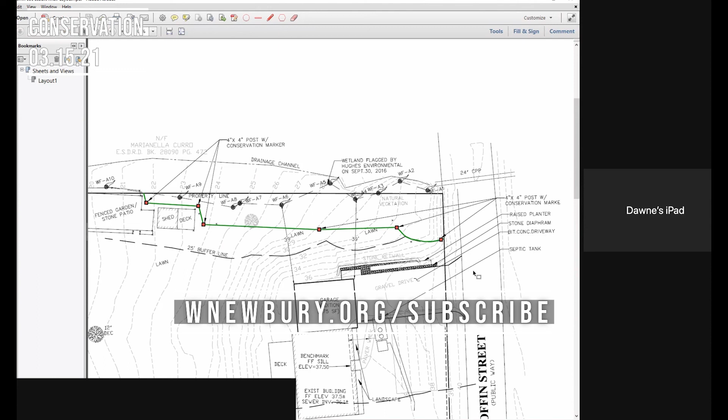Well, based on the submission of the as-built and the new plantings, I move that we issue a certificate of compliance for 25 Coffin Street. Second. Any further discussion? Yeah, I'm just a little concerned that we're not going to be able to have a chance to make sure these trees take. And I understand you planted way more than you needed, but I guess at this point, there's really no provision that we can attach to make sure that the trees take.

So I guess I would say that we were able to, and I didn't do an exhaustive look. It was about 15 minutes. I found about 15 of those dogwoods that have gone in, and they all survived really well. And there are a bunch of dogwoods that went in out of that 28. So I'm 100% confident you're going to have those dogwoods surviving because the last planting did really well in that. So you're going to end up with over 30 native plantings when I think the original commitment was 24.

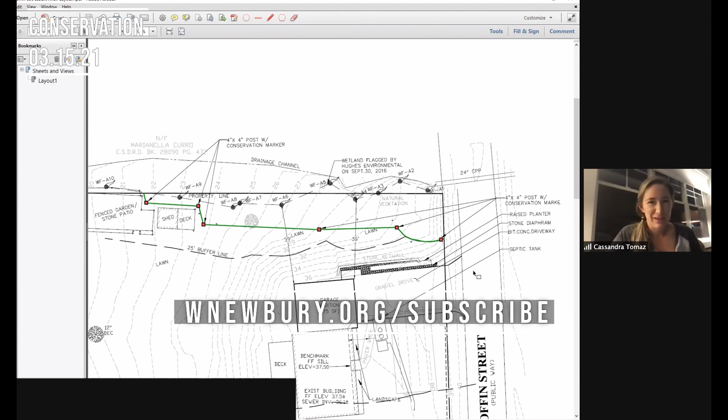So what other species were planted besides the red maples and the dogwood? There was some willow, but there's a willow that was down, and I think we did some cuttings from those originally, and there were red maples that were planted originally. Cassie, what else did you do? Five? We did some blueberry bush and five sugar spice or sugar rush or some name like that. Spice bush, maybe? Yeah, thank you. Yeah.

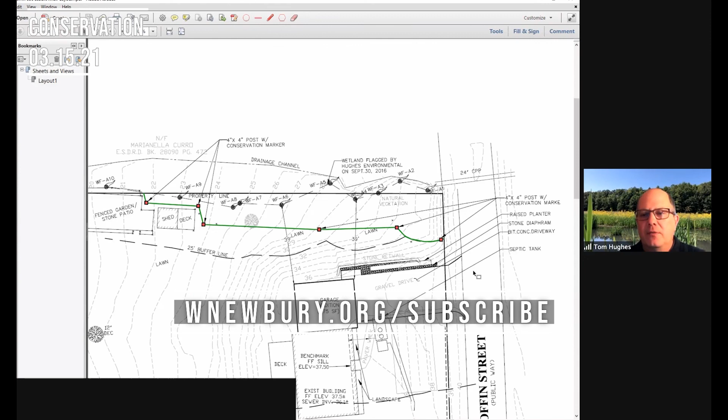The other thing is the dogwoods are really what you need there, and the willows, because you need something that's aggressive. These intermittent kind of channels that form off of roadside swales and all that, they tend to carry a lot of seed stock, and having the dogwoods and the willows there, they're nice aggressive natives that can kind of fight back over time against the repopulation with invasives.

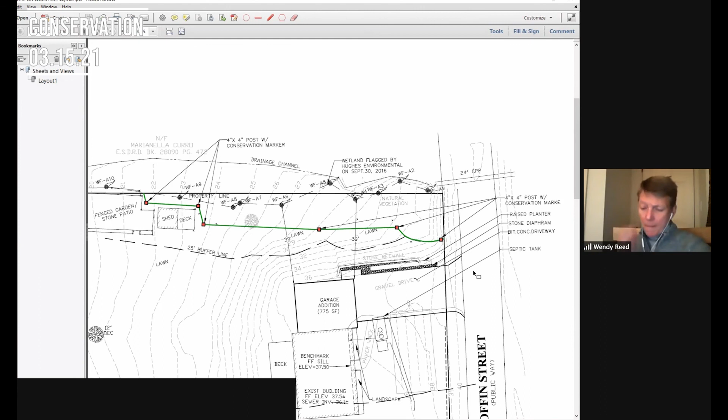Could a list of the plants that were put in be provided to the commission just so we can keep it in the file? Bert has it. He does. Okay, great. Thank you. Any more questions? John, aye. Wendy, aye. Molly, aye. Tom, aye. Judy, aye. Thank you so much.

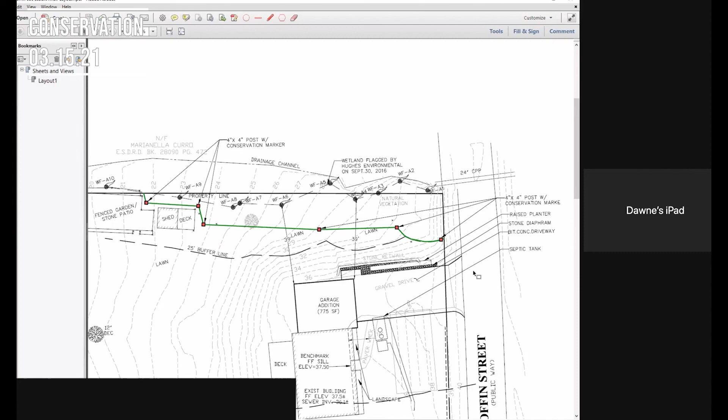Thank you. Welcome. Thank you. Bye. Good luck. Thank you.

Next is a discussion of the Wetlands Protection Bylaw. We had two votes for it. Yeah, that was nice to hear. Yeah. Any other business?

I had a question, Bert, on the Google Drive. I opened it up, but I have enough of my own Google Drive that I'm going to have to buy more memory. I don't know if anybody else had that problem. I opened it. All right, I'll try to figure that out. There was a bunch of stuff to email for this meeting. It might be easier to just put it in Google Drive than send 3-4 emails full of stuff. Yeah, I think it's a good idea. I'm having the same problem with Dropbox on the planning board, because you only have a 3 gigabyte limit.

Why don't I just give you, and everyone else, I made a separate Google account for this drive, so I could just give you the login for that, and then you could just log right into it. Okay. And then you wouldn't be taking up space on your own drive. Okay.